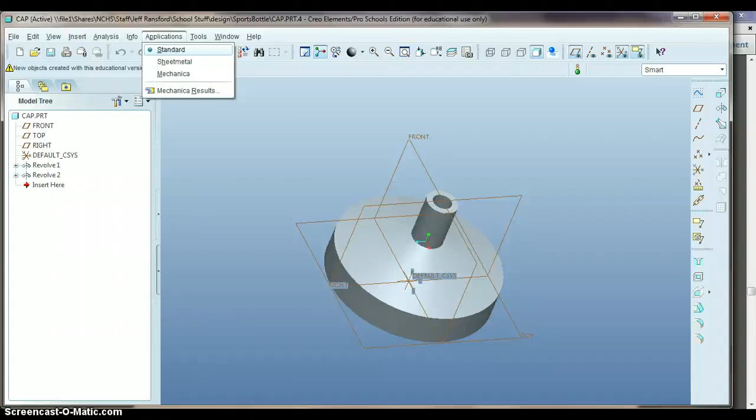Alright, here's our next video, and we're going to finish up this cap. We're going to put some little knobbies on there, kind of like this for grip.

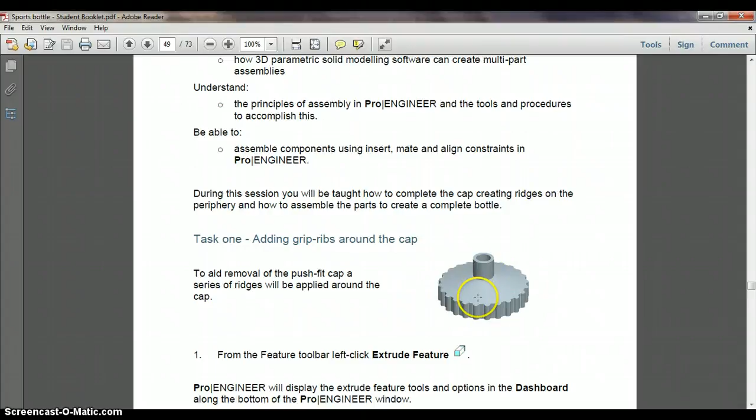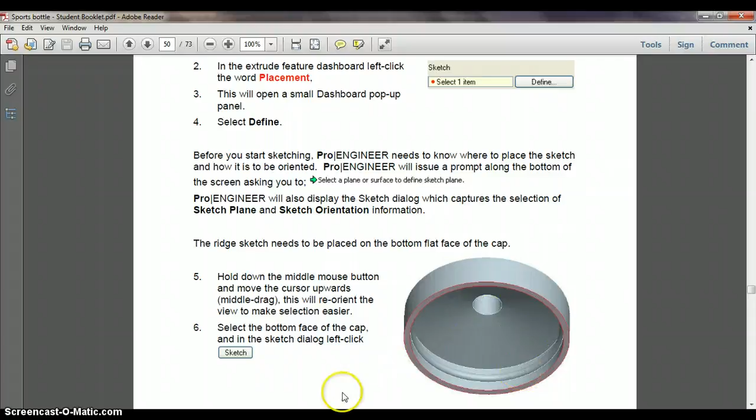First thing we're going to do is click on the extrude feature, the extrude tool, and click placement, and we're going to click on the underside of the cap here. So it's going to look like this.

We're going to go to the extrude, and go to placement, let's say define, and we're going to flip this cap over, and we're going to highlight the underside of this cap, this little ring right here, and we'll click on it.

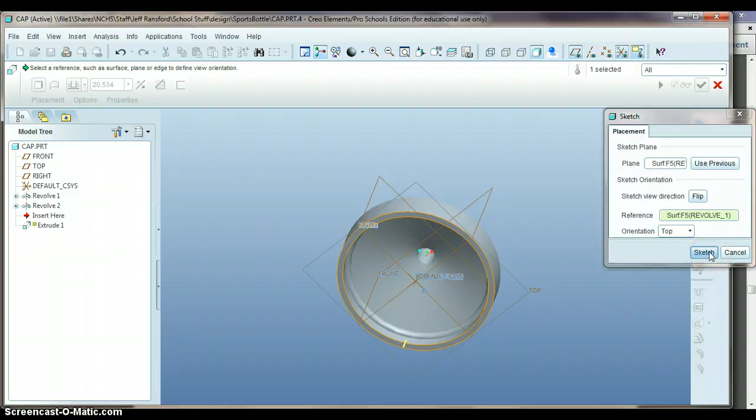It says surface, and for the sketch plane, we'll hit sketch. Now it wants to know a reference that we're going to use, and because we're using this flat surface here, our reference is going to be the outside of the cap.

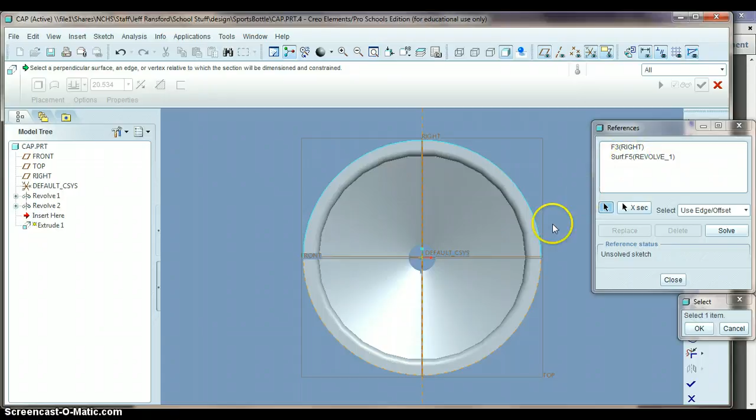If you move your mouse right over to the outside edge of the cap, you can see it turns blue, and I'm going to click on that, and then in the references here the surface comes up, and then we'll hit close.

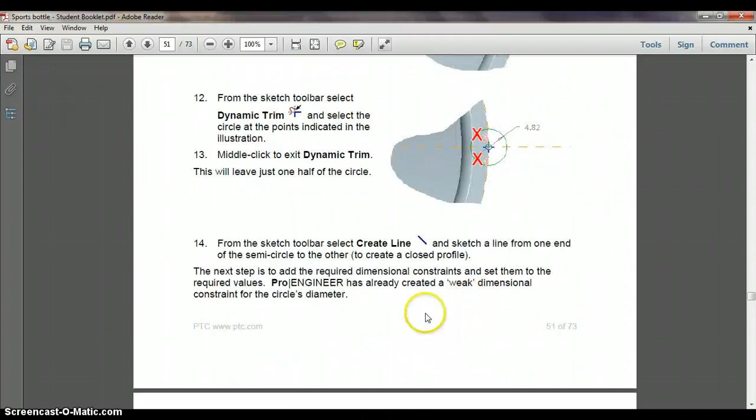Now the next thing we're going to do is create a circle right on the edge where that reference line and the horizontal plane intersect or meet, and we're going to trim off part of it and then create a line there. So it's going to look like this.

We're going to go circle. I'll zoom in just a little bit, and right here I'm going to click and make my circle about this big. We don't want it touching the inside of the cap, and we don't want it too big out here.

So we will create the trim, and we'll trim off this half, the inside half of the circle, and leave the outer half, and then create a line right here. It goes from this half of that arc or circle to this half.

And then I'm going to middle mouse click to complete that line, and it'll take me back. It'll finish up the line for me.

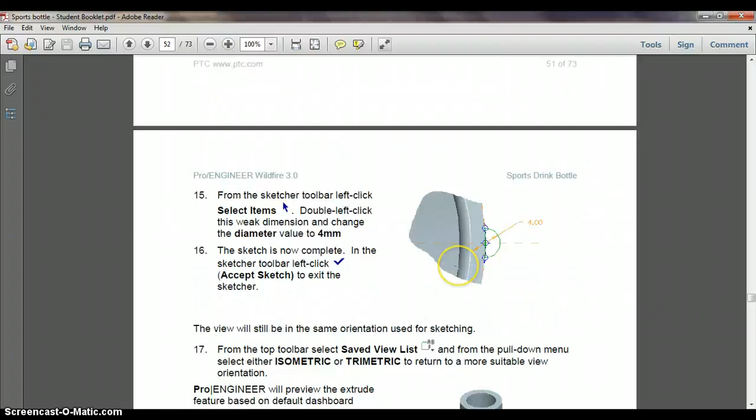Now we need to change the diameter of this to 4, and then I believe that's it. So I'm going to click on the dimension tool, and I'm going to double left click and then middle mouse wheel click out here to get my dimension.

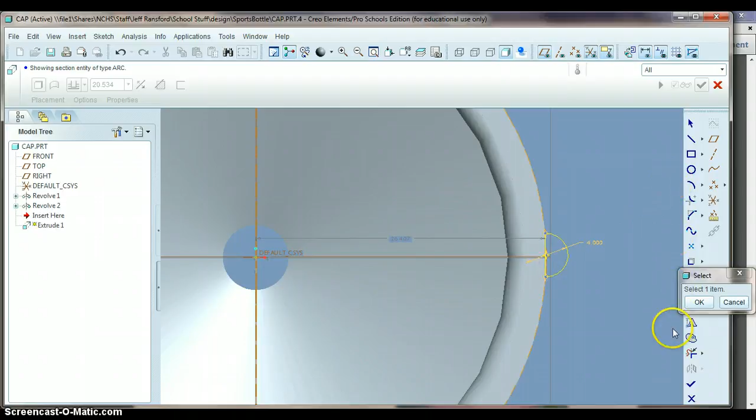We want to make that 4. You see how it's pretty close to 4. We want to make it 4, and then that's it. We can hit the blue check mark, and let's see what we got here.

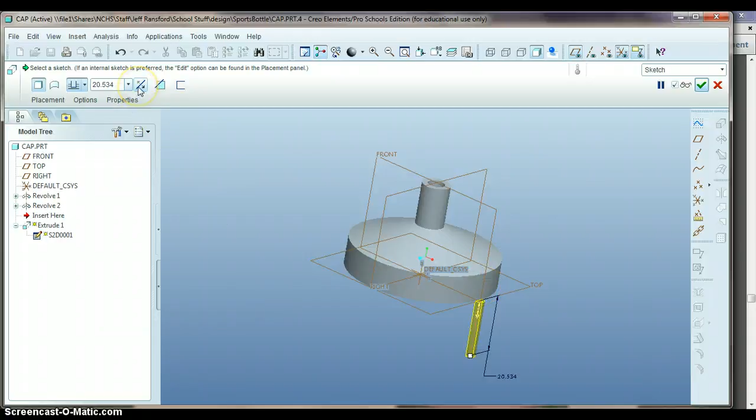And what we have is something going the wrong direction. So we learned earlier we can flip direction using this arrow right here in the middle of the extrude, or we can use this button up here to flip direction.

So we want it pointing up, but you can see it's still too high, so we could drag it down if we wanted to, or we can use this drop down menu, and this button right here says extrude to selected point, curve, plane, or surface.

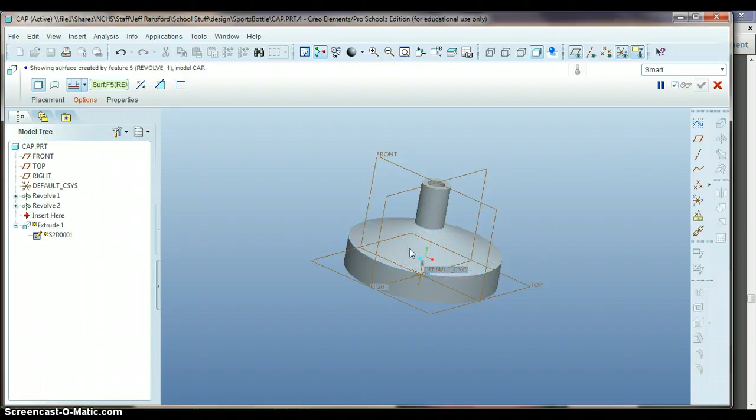So I'm going to click on that, and that wants to know what surface are we talking about, and I'm going to click on the top of this cap here, and now you can see that it matches up with the top of that cap, and I'm going to hit the green check mark.

So we have one knob. Now how do we get the rest of them? Well, I'm glad you asked, because that's what we're going to deal with next.

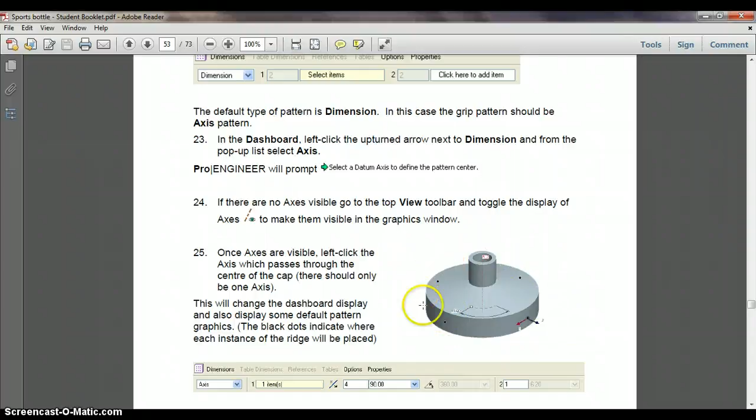We're going to click on the pattern button. I'll show you that, and we're going to make it rotate, make a pattern of in a circular display here. And so let's go back here to Creo.

The pattern button, well, first thing we need to do is we need to highlight the part we want to talk about. So I'm going to click on this extrude, or I can click on the extrude over here in the model tree, click on extrude that we did, and then we'll click on the pattern tool, which is over here. Looks like a block of Swiss cheese or something.

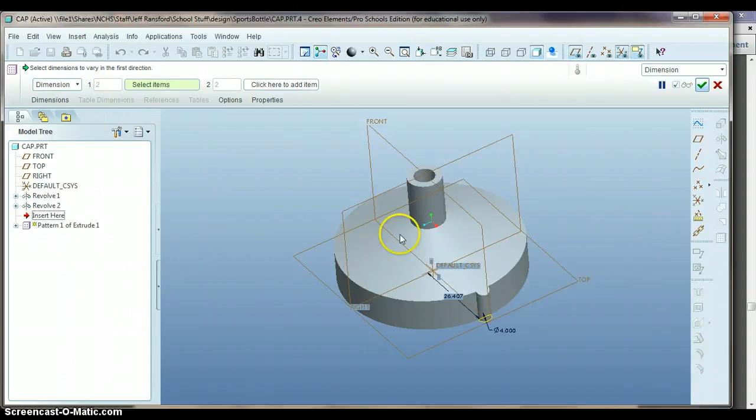Now we need to specify how we want this pattern to look, because we could get a pattern that goes in rows all the way off this cap, but that's not what we want. We want it to go around the outside here. So we're going to go to dimension up here in the top left, and we're going to change that to axis. We want to go in a circular path.

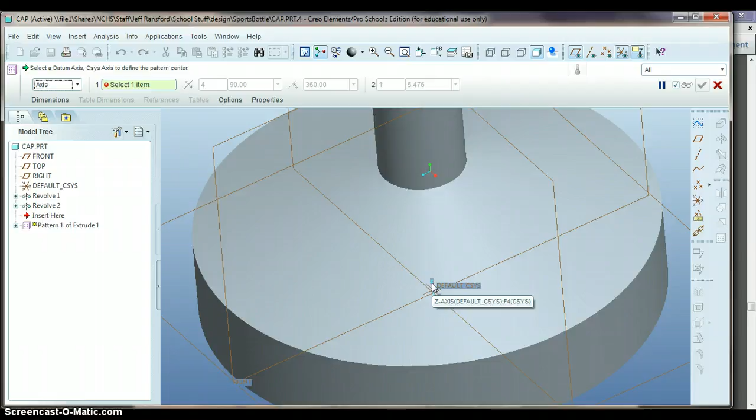There it wants to know which axis are we talking about, and we are talking about the Z axis right here. It doesn't really help to zoom in, but if you kind of highlight your mouse and hold it there for a second, it shows up as the Z axis. So I'm going to click on that.

Now you can see I have 4 dots here. We want to change the 4. The number that we need is 24. I want to change that 4 to 24.

And then we also want to create in a 360 degree path here. If yours doesn't say 360 when you click on that button, we'll just change it to 360, but let me know and I can help you with that. That's pretty much all we need to do. We got the axis, 24, and 360, and then we hit the green check mark.

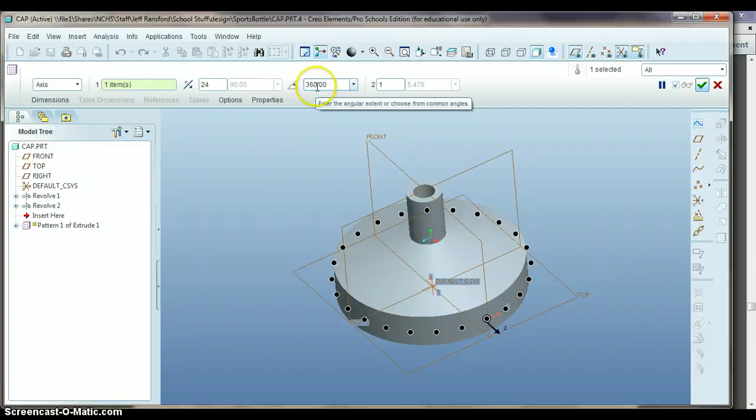And there we go. There's my cap, finished up. Got my knobs, got my grip on it, got my lip underneath, and we're good to go.